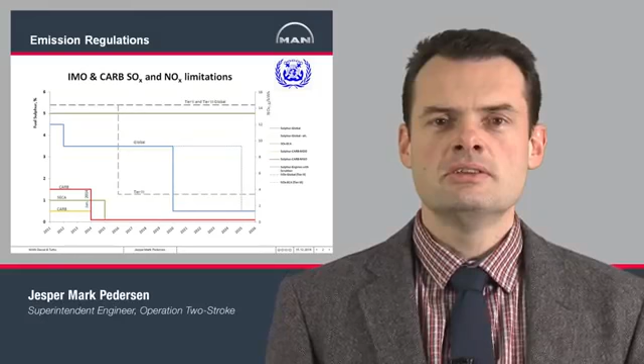Welcome to this video presentation. We have prepared this video in view of the recent changes in the emission rules for ECA areas and the use of ultra-low sulfur fuels to comply with these SOx emissions.

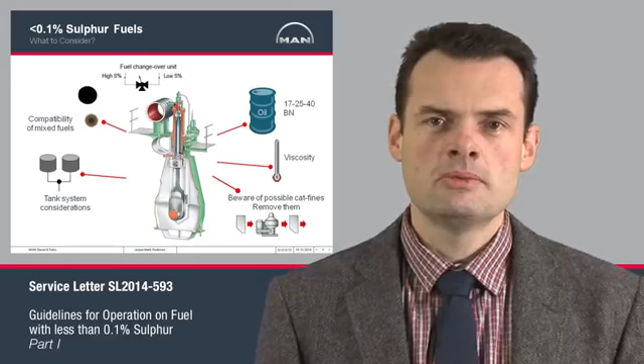There are a number of issues that come to mind when thinking about operating with ultra-low sulfur fuels in these areas, and we will try to address some of the issues that may come up for the operator.

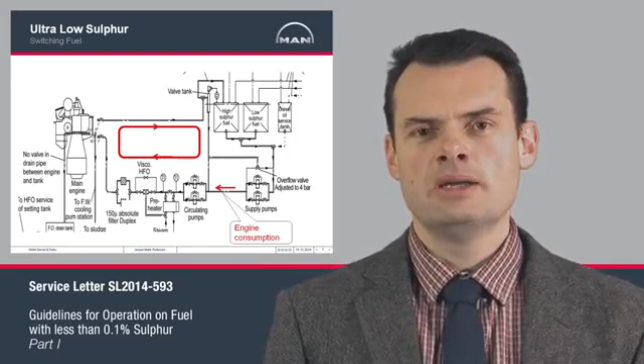The fuel system for the main engine is made of a recirculating pipe system. The fuel in this circuit is recirculated to maintain heat, and when you switch to distillate, the two fuels in the circuit will be mixed together.

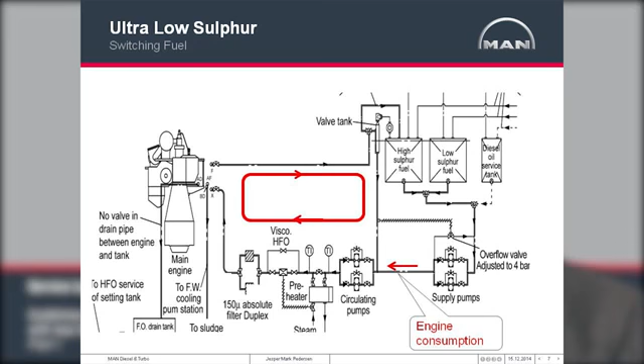The heat in the circuit for the heavy fuel will have a big impact on the viscosity of the incoming distillate, so it's very important to keep an eye on viscosity when switching from a relatively hot heavy fuel to a colder distillate. The size of the system itself also has a big impact on the viscosity drop - the viscosity changes more rapidly if the system volume is smaller compared to a bigger system.

The consumption of the main engine also has a big impact, as the consumption of the main engine is the governing factor for the amount of distillate fed into the mixture.

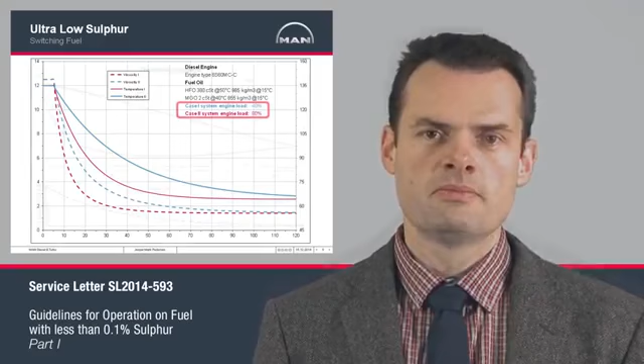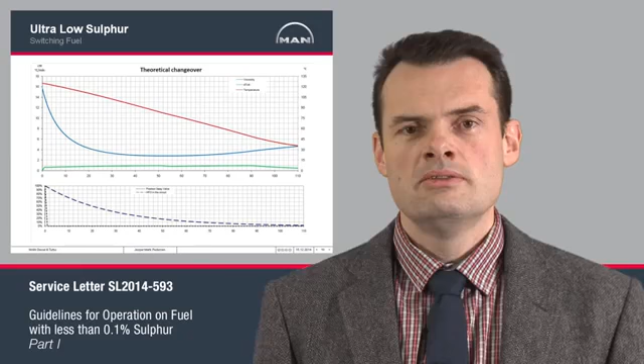A practical example is shown here from a switch from heavy fuel to distillate under steady operation. The engine was operating at 50% engine load, and we switched the valve to distillate and followed the viscosity as the change happened. The temperature would decrease by approximately 1 degree per minute, a little bit lower than the recommendation from our side - we do allow 2 degrees per minute for change - but as you can see here with the given engine load, the viscosity dropped very rapidly.

Halfway through the changeover, the coolers for the fuel system had to be engaged to keep the viscosity high enough to avoid seizures in the fuel pumps. Looking at the example here, it should probably have been done with a lower engine load.

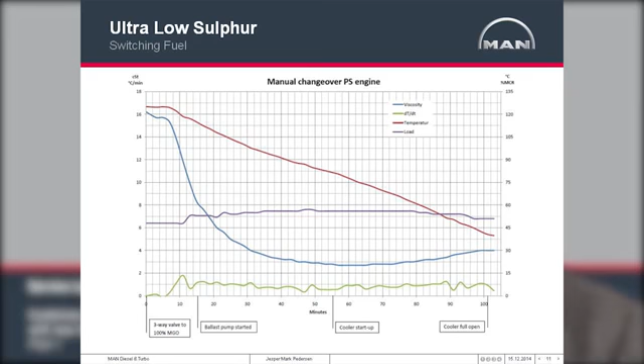The recommendation from our side for switching between hot heavy fuel oil and relatively colder distillate is to decrease the engine load to 25 to 40% and then switch the fuel valve.

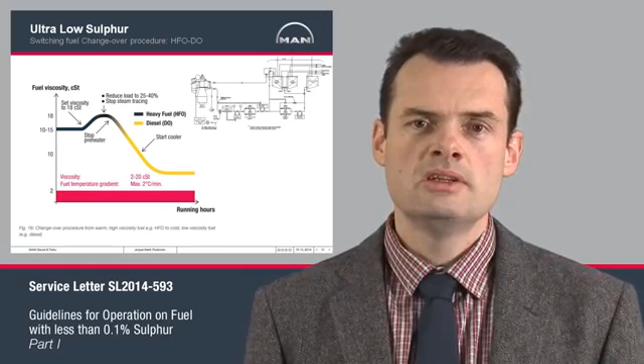During the switch period, the engine load should be monitored, and very importantly, the viscosity. When switching from a hot fuel to a cold fuel, the bound heat in the fuel system will impact the viscosity very quickly. It is therefore key to make sure that the amount of distillate fed into the system isn't too high.

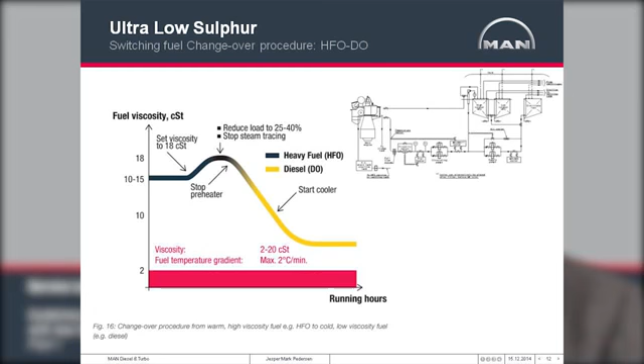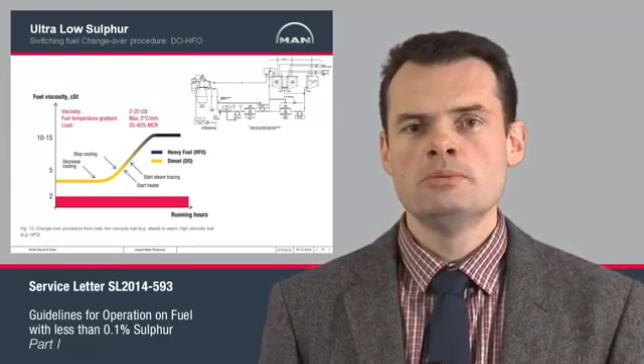When switching from a cold fuel to a hot fuel, or a low viscosity fuel to a high viscosity fuel like heavy fuel, it is more important to keep an eye on the temperature expansion. During this switch, you cannot increase the temperature more than 2 degrees per minute.

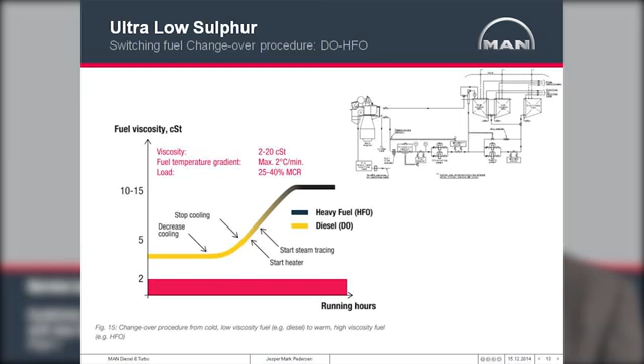If you do so, there is a risk that the clearance inside the fuel pumps between the plunger and barrel becomes too little, and they will start to seize and eventually stick. It's therefore important to keep to 2 degrees per minute to make sure this doesn't happen.

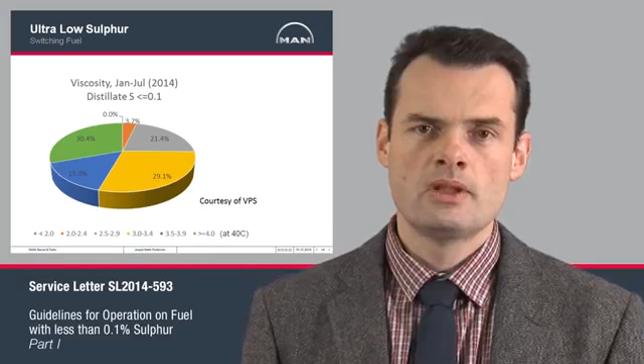Looking at distillates bunkered for ships, they come in different variations of viscosity, but luckily the predominant part of bunkers received for ships usually have viscosities higher than 2.5 centistoke. This makes it much easier to maintain an adequate viscosity on the main engine, higher than 2 centistoke, preferably 3 centistoke, and this can be done by using fuel coolers operated with central cooling water.

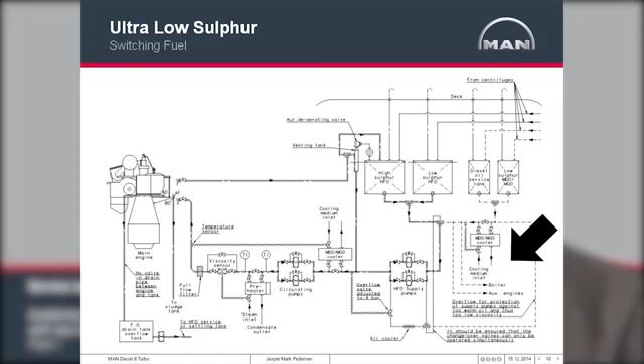Fuel coolers may also be needed for other appliances in the engine room itself - could be for the supply pumps, could be for transfer pumps, it could even be for the boilers, which also have a requirement of 2 centistokes inside the pumps to avoid having seizures.

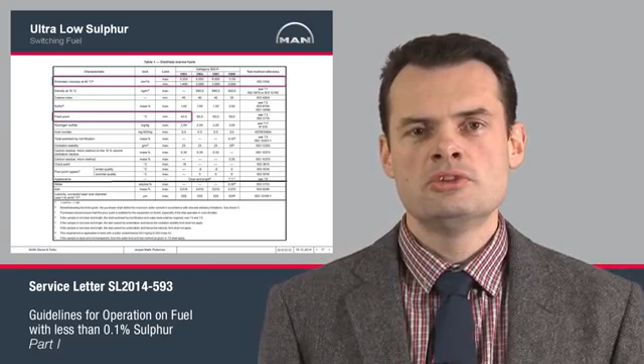Using ultra-low viscosity fuels such as the DMX grade is very unlikely, as this has a flash point too low to be used as a marine fuel. But if an ultra-low viscosity fuel is to be used for the main engines, there may be extra need for cooling to the fuel circuit.

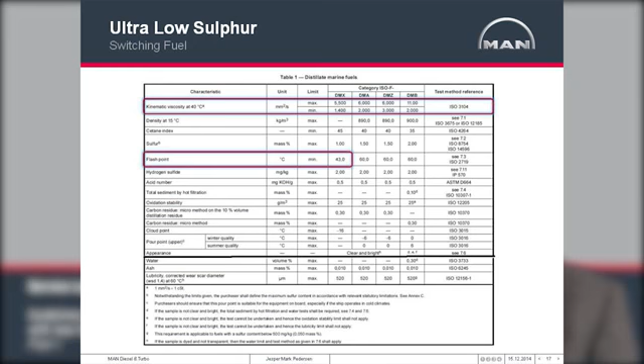For this application, a chiller unit can be installed. The chiller unit is a cooling system which will cool the fuel coolers, and as such be able to maintain temperatures lower than 40 degrees, all the way down to 20 degrees.

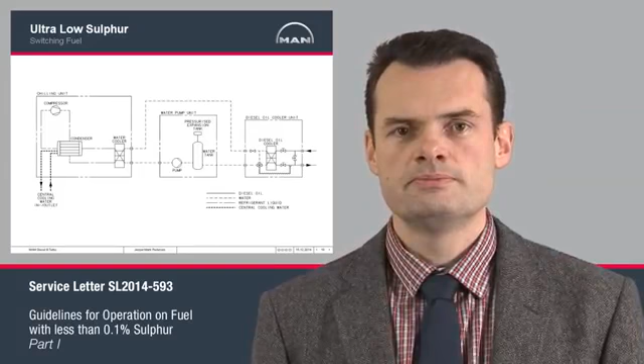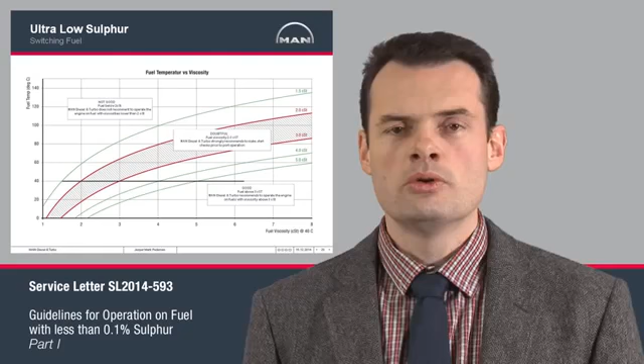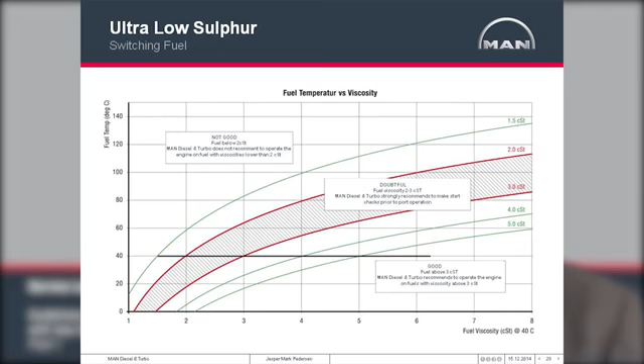We have retained experience from the 2009 switch in California, where CARB emission rules made it necessary for ships to operate on MGO in these areas. The experience we gained was that it's very important to keep an eye on the temperatures in the fuel system itself. As the engine slows down for maneuvers, the fuel oil is recirculated inside the recirculating system and is heated by the pumps and the engine itself. The viscosity thereby drops, and it becomes crucial to be able to cool the fuel to avoid seizures inside the fuel pumps.

Another topic that came up with the CARB ruling was that the number of loss of propulsion incidents increased dramatically just after the introduction of the need for MGO operation. These incidents were predominantly caused by ships not being able to start the main engine on demand, and from what we know, no ME engines were involved in this.

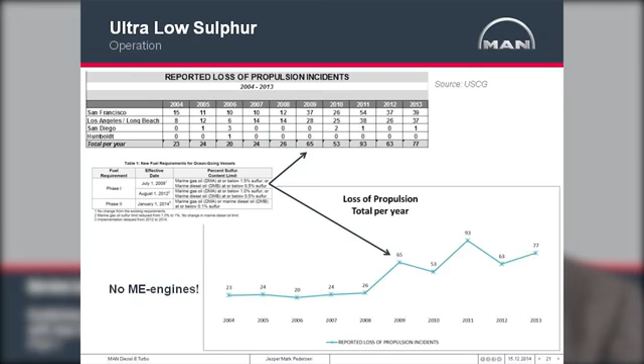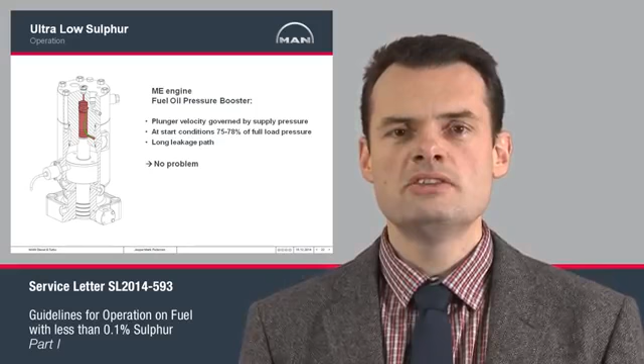This can be explained by looking at the fuel booster design, the difference between the ME engines and the MC engines. In the ME engines, the stroke of the plunger is not constant, it changes with the engine load, so we have a large distance between the low pressure drain side and the high pressure injection side. In the MC engine design, we use a constant stroke fuel pump and change the angle of the bleed cut to change the active filling of the fuel pump. We therefore have a very low distance between the high pressure side and the drain side, and the internal leakage inside these MC engine fuel pumps is much greater than for the ME engines.

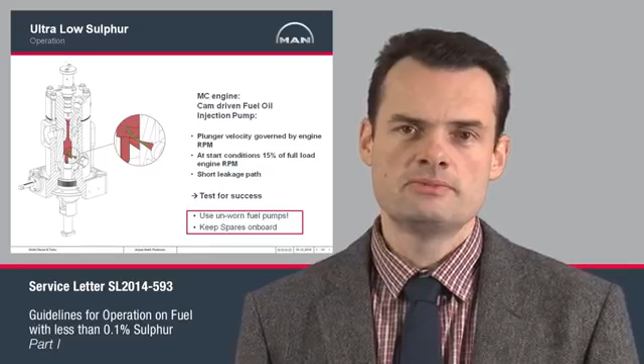We therefore recommend that the fuel pumps used in the ECA areas are not worn pumps, and that ships have enough spares on board to do the replacement before entering the ECA areas. It is also a good idea to do a starting test before entering the ECA areas to avoid these problems occurring when entering port.

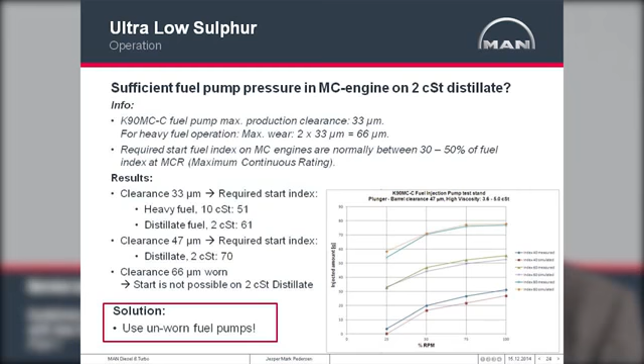For engines operating continuously in the ECA areas, there is a larger risk of liner polishing. Normally, the sulfur in the fuel maintains a certain degree of cold corrosion, which keeps the liner surface fresh and open in structure, able to sustain a lube oil film. When operating on ultra-low sulfur fuels, the cold corrosion is suppressed completely, and eventually the liner surface will most likely polish up. A polished liner gives a high risk of a scuffing incident, which will cause an untimed overhaul of that unit.

By using cermet-coated piston rings, there will be a larger degree of reliability for this unit. Cermet-coated piston rings can actually sustain a scuffing incident without needing an immediate overhaul, offering a certain degree of reliability when using full cermet-coated piston ring packages in the ECA areas. We therefore recommend that engines operating continuously inside ultra-low sulfur areas utilize full cermet-coated piston ring packages, with cermet coating on all 4 piston rings.